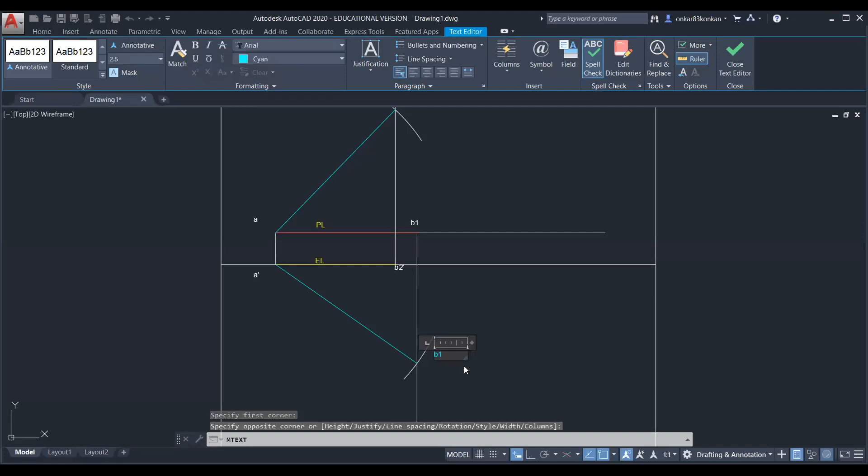Now from A dash point, draw the line which will connect this point. Okay, so this point, this is nothing but the B1 dash. Okay, so if you draw one horizontal line from B1 dash, you will get the locus of B dash.

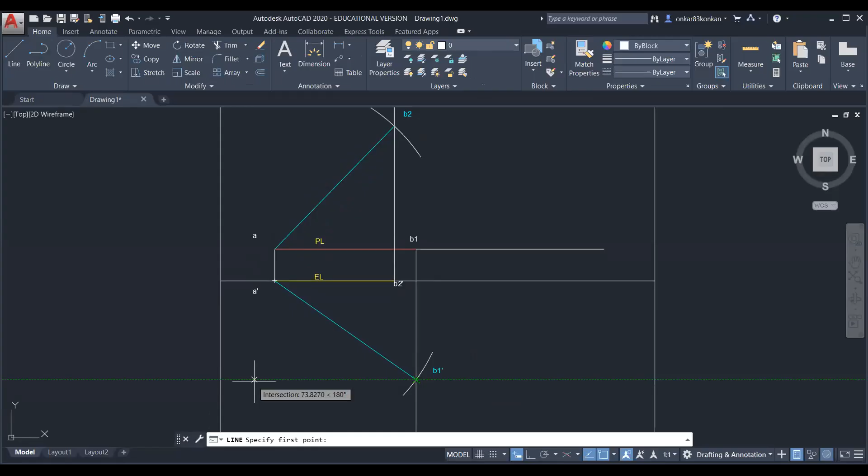And this point, which is corresponding to B2 dash, this is called as a B2 point. Okay, so if you draw one horizontal line from B2, you will get the locus of point B. Okay, so now draw the horizontal line from point B1 dash and from point B2.

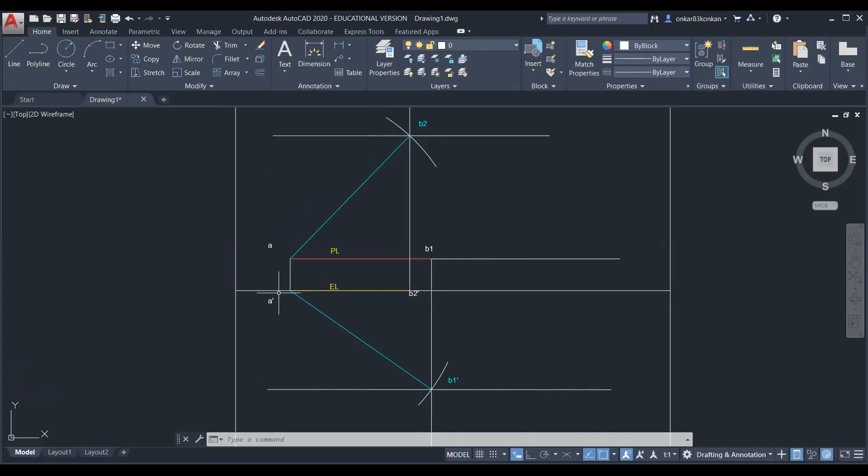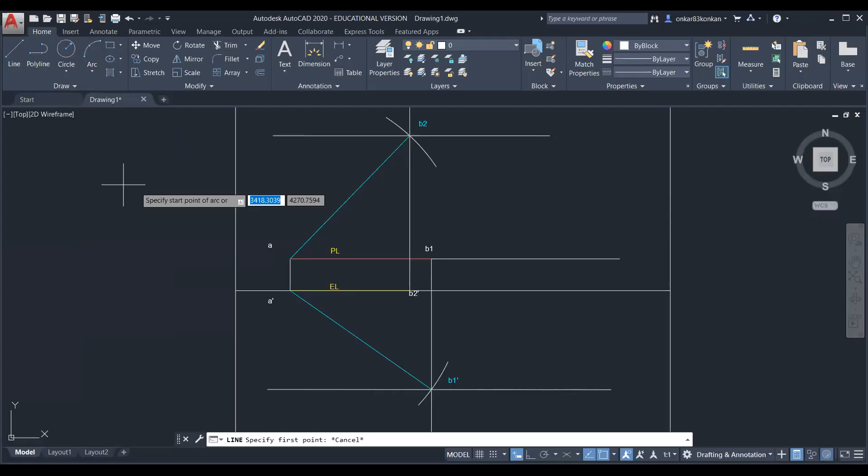Okay, and just you have to draw the curve from point B1 with A as a center, and from point B2, that is a B2 dash with A dash as a center. Okay. So select A as a center, take the distance equal to B1, that is a plan length. So plan length is equal to actual top view. So you have to draw this arc.

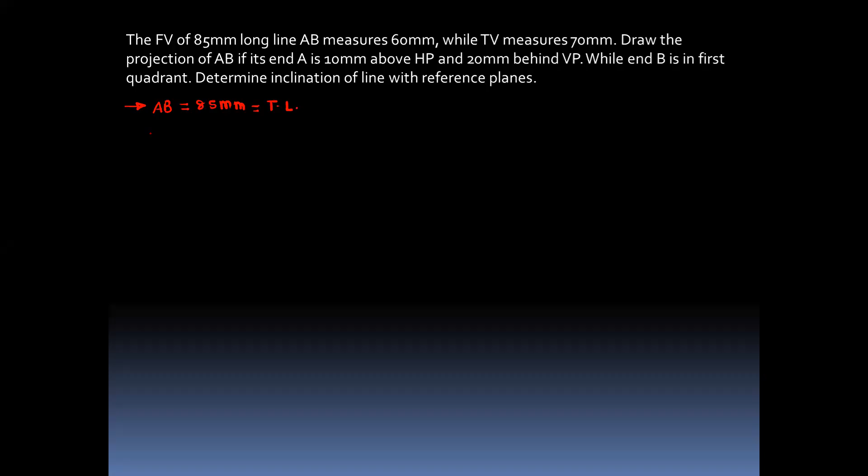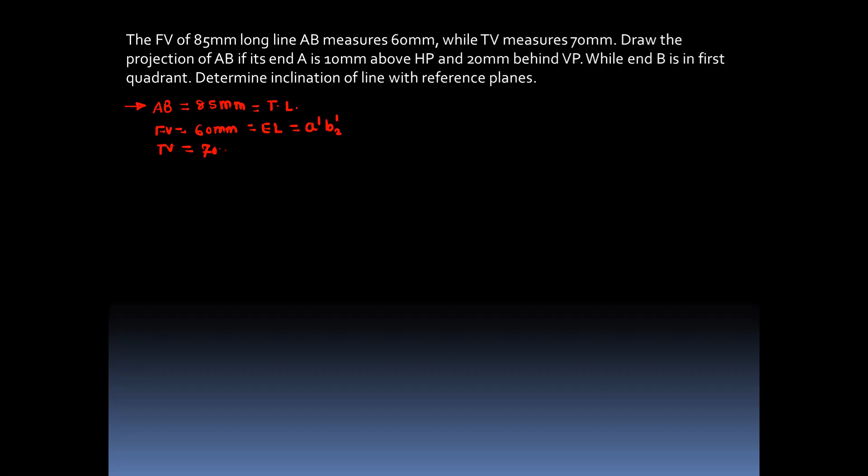The front view of the 85 mm long line. So true length of the line, this is equal to 85 mm. So this is the true length. Front view is equal to 60 mm. We know that front view means this is equal to elevation length, and that is equal to A dash B2 dash. Then top view, this is equal to 70 mm. So this is equal to plan length, that is equal to A B1. Okay.

Then point A is 10 mm above the HP. And it is 20 mm behind the VP. Okay, so just make the change. Actually, this line, it is in the second quadrant, first and second quadrant. Okay, because point A, it is in the second quadrant, and B, it is in the first quadrant.

So 10 mm above HP and 20 mm behind the VP. That means it is a second quadrant. So A, it is in the second quadrant. Okay. Then point B, it is in the first quadrant. It is given in the last line, while end B in the first quadrant. Determine the inclination of the line with the reference planes. Okay. So if you want, you can draw the three-dimensional diagram.

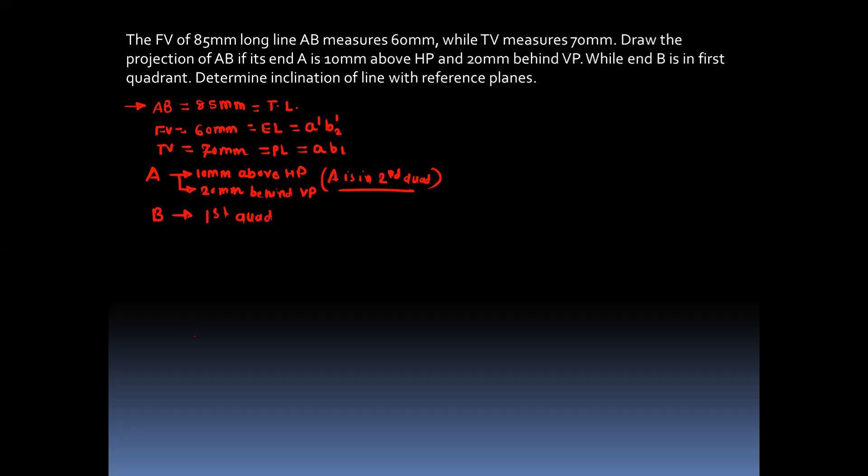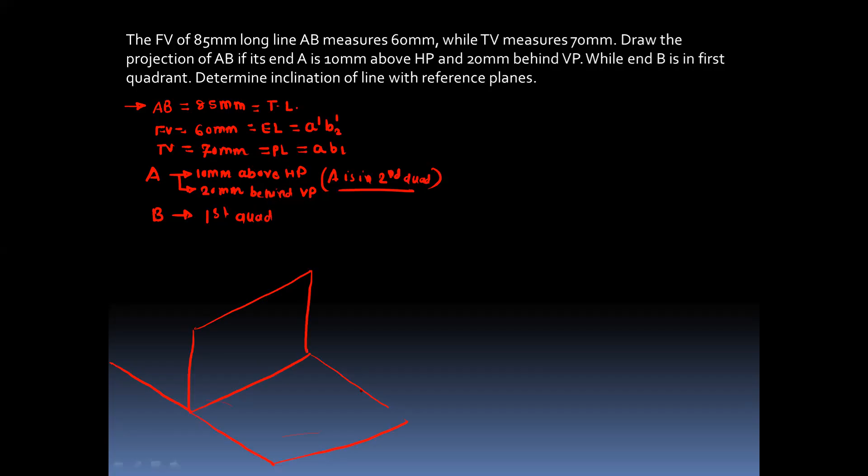So this is the first and second quadrant. So this is the vertical plane. This is HP and this is also HP. So you can locate the point A, 10 mm above HP, 20 mm behind the VP. So 20 mm it is behind the VP.

So this is 20 mm. So this is your point A and 10 mm above HP. So this is 10 mm. Second point B, it is in the first quadrant. We don't know exact location, but it is in the first quadrant. So this is your complete line AB. One point it is in the second quadrant, and the point B it is in the first quadrant.

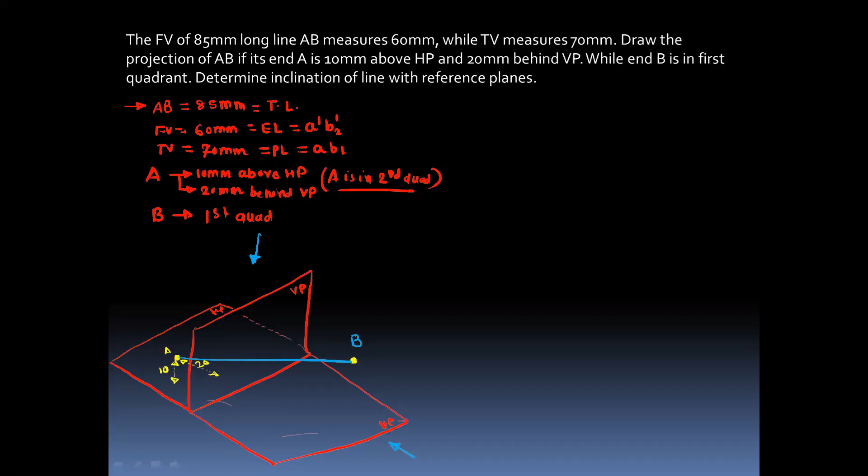Okay. So now for the projection, you can draw the projection of point A directly because distances are given. So if you observe from the top view, you can observe this 20 mm behind the VP distance. And if you observe from the front view, you can observe that 10 mm above the HP distance. Okay. So as the point A, it is in the second quadrant, that means after rotation, its front view and top view both will be above the XY line. Okay.

So this is HP and VP for point A, and this is the vertical plane and the horizontal plane for the point B. So how can you draw the projection of point A? Just observe from the front view. From the front view, you can observe this 10 mm distance, which is above HP. So take the distance 10 mm.

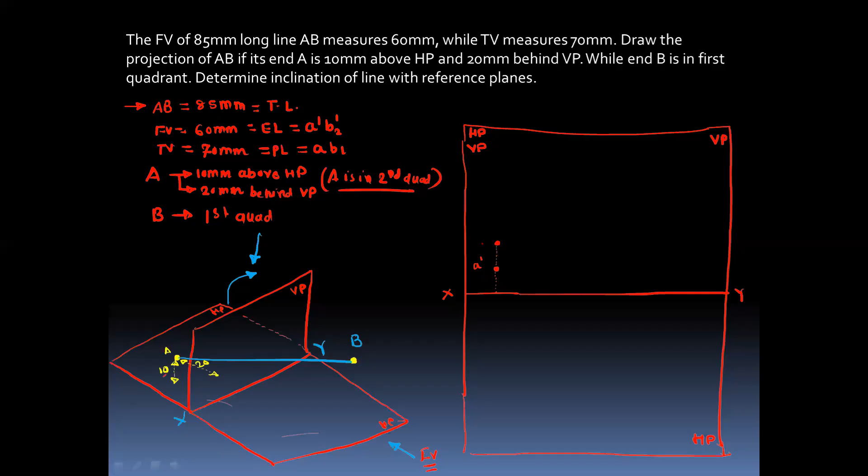At 10 mm distance, this is the front view, that is A dash. Just extend this projection. At 20 mm distance, show the point A, because at 20 mm it is behind VP and that is visible in the top view. So both A and A dash lie above the XY line, as the point A is in the second quadrant. Okay. Now from A and A dash, you can draw the horizontal line as a reference line.

So what is the need of these two lines? On these two lines, we can draw the plan length and the elevation length. Okay. So now refer the plan length. Plan length is given as 70 mm, so it is AB1. On this line, we have to draw the plan length. Starting from point A, this is the plan length. So this point is B1.

Then from A dash point, draw the horizontal line that is equal to 60 mm. So this is B2, that is B2 dash. So this is the plan length and this is your elevation length. Okay. Now when will we get the plan length? Plan length is the top view when the line is parallel to the vertical plane.

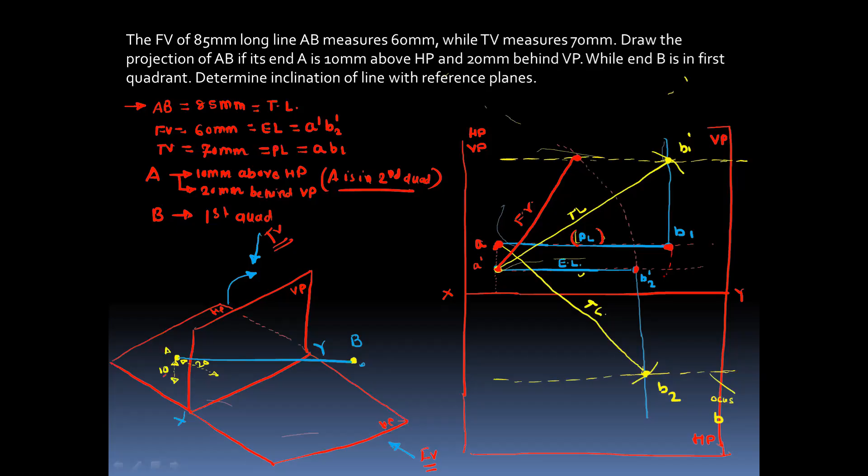And for the top view, take A as a center, radius equal to the plan length. Okay. Draw this arc. So this will give the actual top view. Okay, so in this way you can complete this projection.